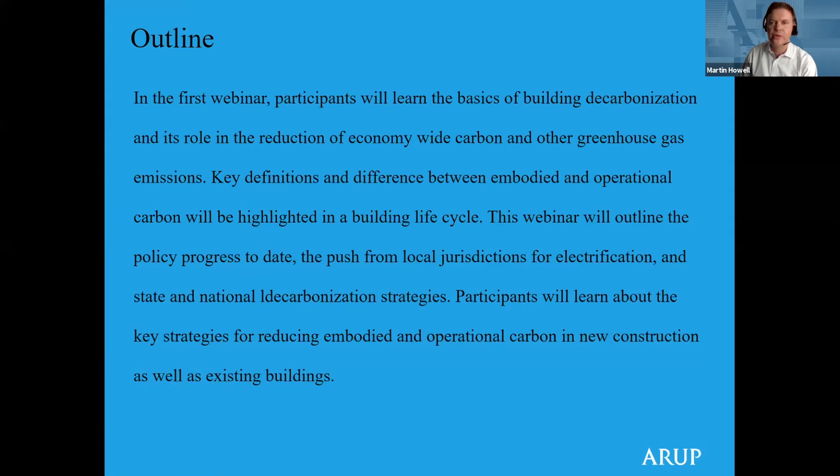And so, as Ruby mentioned, this is the first of 3 webinars focused on decarbonisation. This particular session is titled Carbon 101 and is really meant to be a foundational session that will cover some key definitions. It will outline some of the policies and other drivers for decarbonisation, as well as touching on some of the enabling approaches and trends that are leading us down the path of decarb. It will also briefly cover the differences between embodied and operational carbon, but we'll be leaving the remaining 2 sessions to do a deeper dive on those, and those I think are envisioned to happen in March and April.

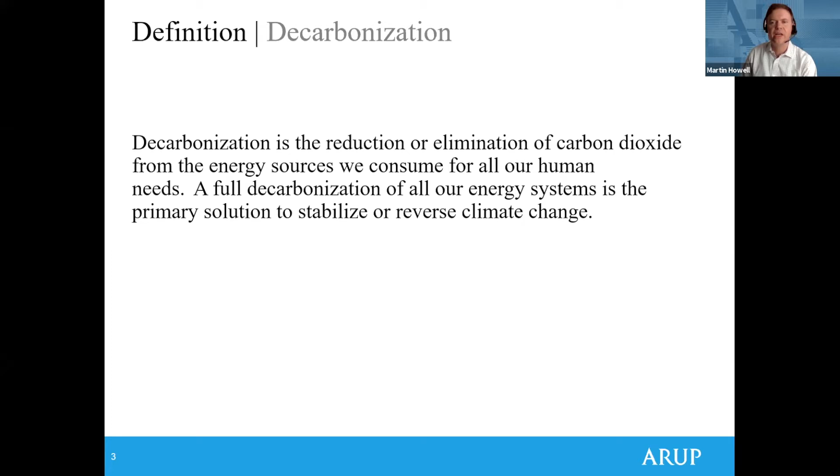There's a range of approaches that are used to decarbonize, ranging from using energy in a more efficient way, say in our buildings, to generating energy using renewable resources like the sun or wind. When designing buildings, this also begins to touch on choices made in the selection of materials, perhaps with a focus on materials that are more natural, such as timber, or those with a smaller carbon footprint from the manufacturing process. And then there's also personal lifestyle choices that can help us to decarbonize. So, for example, choosing to carpool to the office, or to take public transportation, or choosing a less carbon intensive diet, like a plant-based diet.

So scope 1 covers the emissions from fuel directly burnt on site. So say for a higher education campus, that would typically include natural gas that's used to provide space heating and domestic water heating. And if the campus owns, say, a fleet of vehicles for maintenance that uses fossil fuels, it would also include the emissions from those. Scope 2 covers the emissions from electricity that's produced off-site, typically by a utility company like Edison, but used on the campus. So again, with our higher education example, that would include the electricity associated with lighting the buildings, running fans and other equipment needed for air conditioning and so on.

And then scope 3 is by far the largest bundle of emissions and pretty much covers everything else. So again, for our higher ed campus, that might include business travel by employees, say for attending conferences. It might include the emissions associated with outsourced activities, such as maybe food service, and also covering emissions associated with products purchased for use on the campus, as well as things like carbon associated with the construction and renovation of buildings.

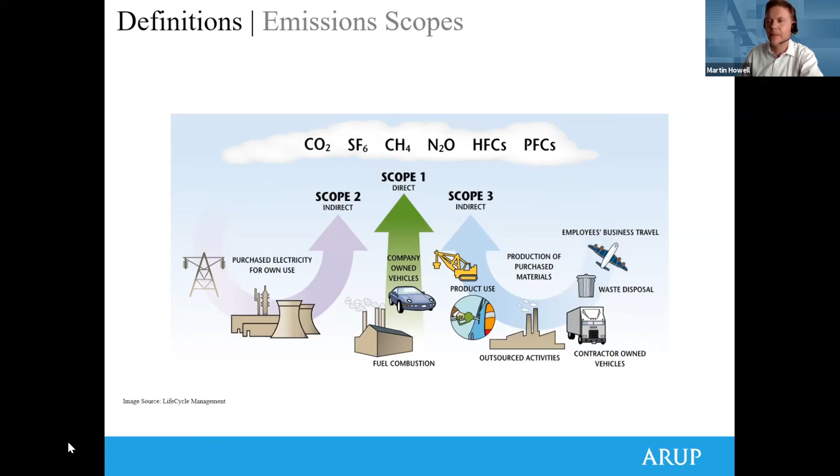So a few more definitions that we're hearing a lot about currently. These are all focused on finding ways to decarbonize the built environment. All of them actually focus on Scope 1 and Scope 2 emissions, so fossil fuels burnt on site plus purchased electricity. The first two definitions are used somewhat interchangeably. That is a zero net carbon building and a carbon neutral building.

These would typically be referencing buildings that have implemented pretty high levels of energy efficiency. And on an annual basis, they are cancelling out the amount of carbon emitted through the use of energy by either sequestering an equal amount of carbon or offsetting through on-site renewable energy production, or in some cases procuring off-site renewable energy, or even purchasing carbon credits to wipe out the carbon debt.

So again, the accounting is typically completed at the end of the year, and when the annual carbon emissions are fully offset, that building will be a net zero carbon or a carbon neutral building.

The third description here, a zero carbon building, is one where no carbon was really emitted from the get-go. So really, this is where we should be heading with our buildings. In this case, it will likely be, again, a highly efficient building with on-site renewable energy and in all likelihood some form of on-site storage that allows it to capture excess renewable energy and use that on-site when needed.

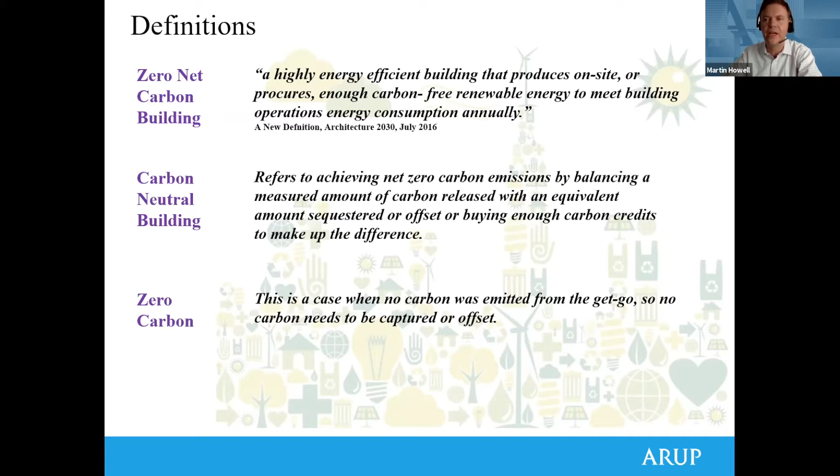And so onto the drivers for decarbonisation, and we've touched on some of these already, but these are really broken down into economic, environmental, and societal. So the three-legged stool, or triple bottom line, as it's also known. Under economic, we have rising energy costs, and the idea that implementing energy efficiency and renewable energy on site will provide some level of insulation against these.

I think another way of looking at that would be to say that energy costs will really start to rise when we start seeing the impact of infrastructure upgrades required by things like electrification and grid hardening, but also that we might see other pricing triggers like carbon pricing start to factor in, similar to the way it has in New York through Local Law 97, which requires existing building owners to invest in decarbonization strategies or be exposed to fines. So energy efficiency and on-site renewable energy will really provide some protection from these economic triggers.

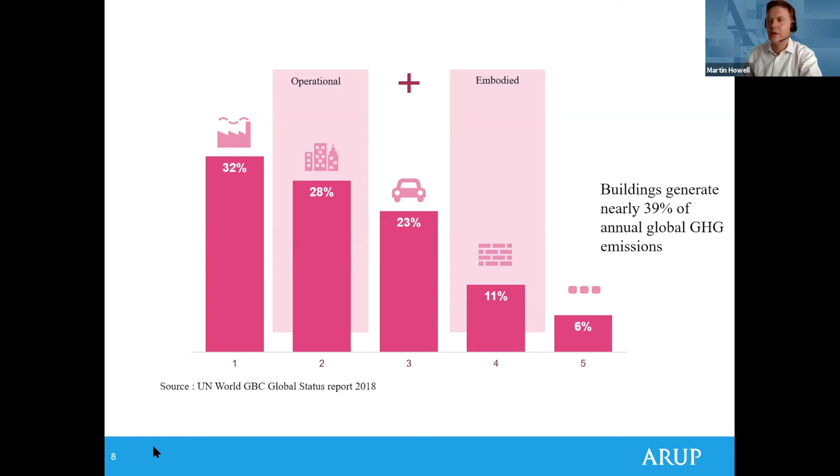These continue to get updated, typically on a 3-year cycle, and continue to aggressively require increased levels of energy efficiency. And they've also started to now impact existing buildings that are undertaking major renovations as well. But additional mechanisms will probably be needed in California to help decarbonize existing assets.

Enabling renewable energy is also critical, and that should recognize that some systems might be on-site, some might be off-site, as driven by the spatial constraints of a given building or given site. For off-site, that could include things like community solar, or arrangements with utility companies to develop a solar system for a specific entity to offtake that solar.

We've also seen code changes that are driving renewable energy, including a requirement that solar is provided now on residential buildings in California, and that non-residential buildings are designed to allow a solar system or a renewable energy system to be added at a later date.

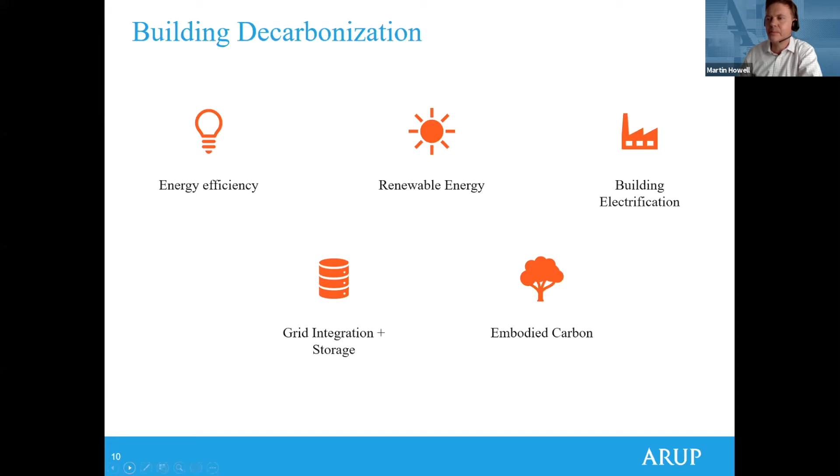So moving on now to some of the policy targets that are already out there. So these really start at the global level, set by the Paris Accord, which is moving us towards a climate neutral world by the middle of the century. And then we move down to the commitments that the US previously made for the Paris Accord, which will see us commit to limiting global warming to 2 degrees, preferably closer to 1.5 degrees compared to pre-industrial levels.

So the goals on the screen in blue are the goals that were set previously by the Obama administration, and they will be updated by the current administration as part of rejoining the Paris Accord. And then on the next tier down, we have the state targets and state policies. So AB 32, which initially set California's commitment to decarbonization back in around 2006.

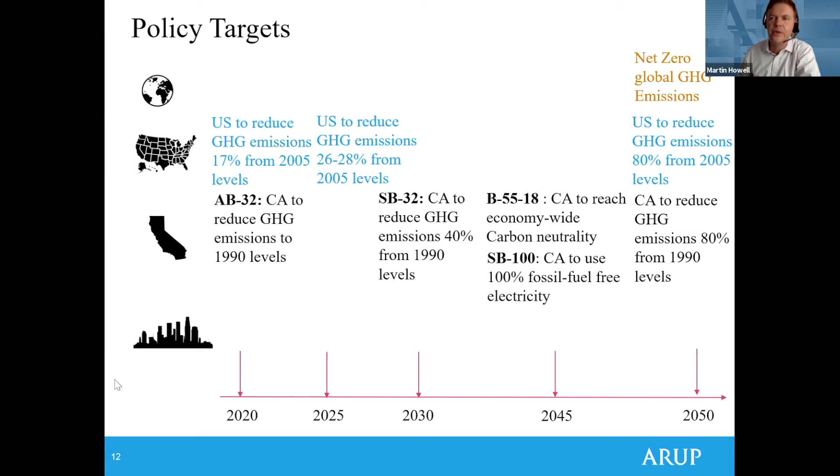And since that point, there's been additional bills that are now committing the state to reduce emissions by 80% compared to 1990 levels. Additionally, there's SB 100, which requires utilities to push towards providing 100% fossil fuel-free electricity by 2045. And that's really driving the push towards electrification of our buildings and transportation systems.

And then finally, we have the local policies, and these are taken from the City of LA's Green New Deal. So this is calling for all new buildings to be net zero carbon by 2030, and for the city to be carbon neutral by 2045. So a range of progressive policies in California, and I think the hope is that we're going to start seeing some similar ones be drawn out by the federal government.

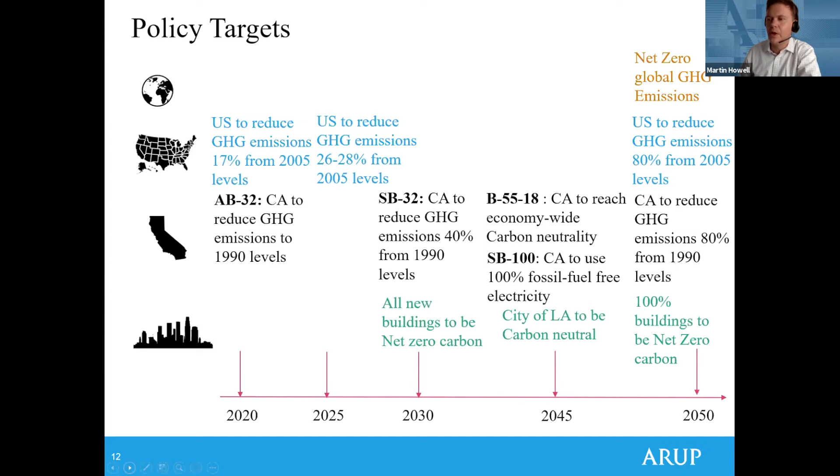So the next one I wanted to talk about was the subject of electrification, and this is really continuing the theme of local policies. So the trend of electrification, which is really substituting appliances and end uses normally served by natural gas with electricity.

So we're seeing some cities now adopt what are called REACH codes. So these are policies that exceed the state energy codes, and they are leading to the limitation of natural gas usage, or the banning of natural gas completely at the city level. So this charge was really led by the city of Berkeley, which banned natural gas in new multifamily residential buildings. San Francisco has more recently banned natural gas in all city-owned buildings and all non-city-owned new construction.

And then we've seen some cities limit natural gas use, so maybe allowing it for certain building types or end uses, such as maybe cooking. But other cities have a broader mixed energy policy, so are pushing for increased energy efficiency, for example, when allowing the use of natural gas. So in all, there's about 26 plus cities in California with some sort of natural gas limiting policy in place.

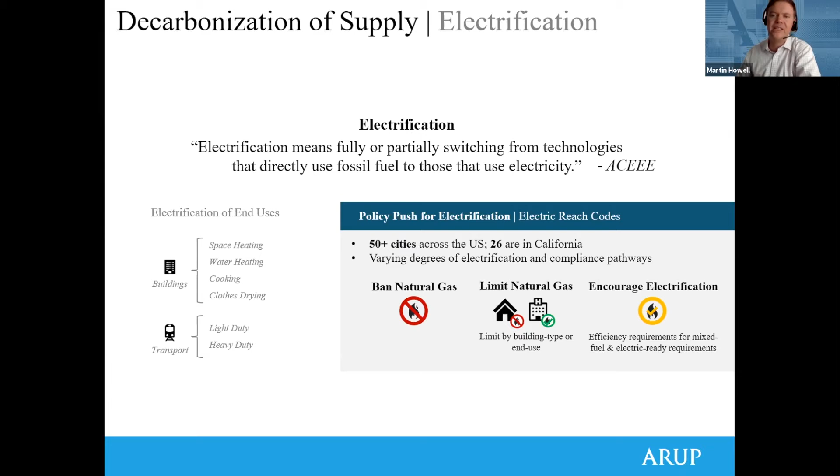And then the final one for me before I hand over to Zara, the other trend we're seeing in other parts of the world and are starting to see creep in here is a focus on decarbonization of natural gas networks. So Hy4Heat in the UK is one current example of a program that's looking at appliances in homes and their ability to burn different blends of hydrogen.

The driver for this is that electrification currently makes sense in new construction from a cost perspective in many cases. It's a lot more challenging to implement electrification within existing buildings. So we've seen governments in Europe and Australasia start implementing pathways to decarbonize natural gas networks by blending hydrogen of differing amounts, and in some cases looking at fully replacing natural gas with hydrogen that's produced from curtailed renewable energy, or where emissions from the production of the hydrogen are sequestered.

We've also seen, locally, SoCalGas go public recently with a hydrogen blending trial that will seek to blend renewable hydrogen within their existing network. So I think the takeaway here is that decarbonization is going to be a huge challenge that we're all going to have to wrestle with, and there's really going to need to be a broad suite of strategies on the table in order to get us to the point where we've really removed carbon from our lives.

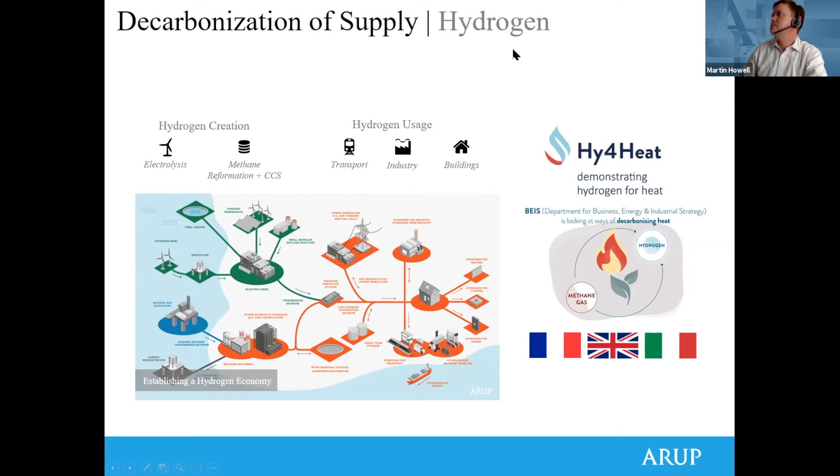Thank you, Martin. If you could bear with us for a minute as I share my screen. Can you stop sharing, Martin? Yep. Okay. All right. Share screen. All right. Can everyone see my screen? Yep. All right. Okay.

After understanding what decarbonization of the built environment means and going through some of the basic definitions and policies, I wanted to highlight the difference between embodied and operational carbon a bit more, with a larger focus on embodied, as most of us are more familiar with the latter. Until only recently, embodied carbon was a significant and largely ignored gap in the industry. It is gaining increasing attention, and it is now recognized that embodied carbon emissions make up 20 to even 50% of the whole life carbon emissions of a new building.

Embodied carbon, by definition, is the carbon emissions associated with the materials and construction processes throughout the whole life cycle of a building. In other words, it is a carbon footprint of all the materials and the products that go in a building. It considers how many greenhouse gases were released throughout the supply chain, and building elements such as foundations, frames, and other forms of superstructure often represent the biggest contributors to embodied carbon.

Operational carbon is a term used to describe the emissions of carbon dioxide and other global warming gases during the in-use operation of a building. A typical building uses energy to meet heating, ventilation, cooling needs, and then the other uses such as lighting, cooking, plug loads, domestic hot water, they also consume energy. It's important to note, however, that operational carbon does not include water use.

Recognizing that we don't have much time left to address climate change, we need to focus on strategies that can deliver the largest reductions in the shortest time. And reducing embodied carbon emissions provides that opportunity because of the time value of carbon. Since most of these emissions happen even before the building operates, we need to consider not only the amount of savings, but the time frame of those savings to meet the emissions targets that are set out by the Paris Accord.

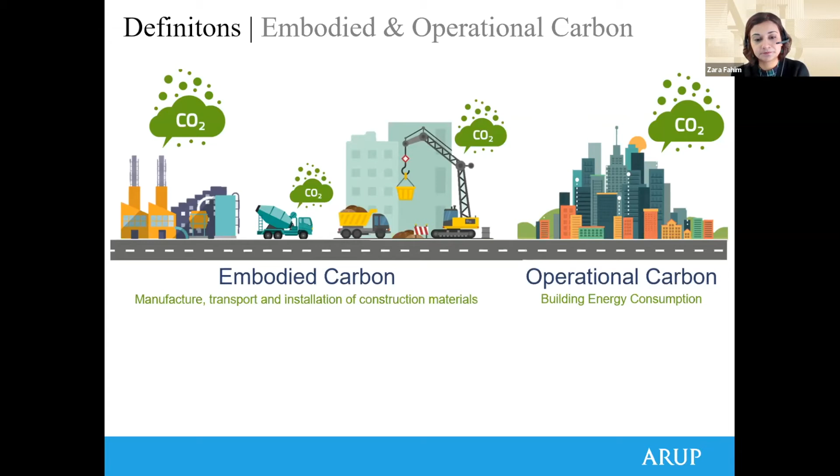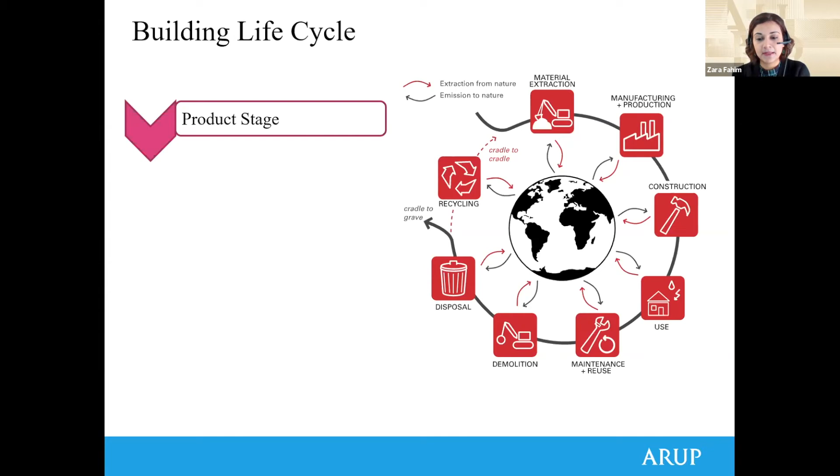What does the term building whole life cycle mean? It begins with what you call the product stage. The product stage includes the emissions caused during the material extraction, transport to the manufacturing facility, and the manufacturing itself. Then comes the construction stage. The construction stage includes the transportation of these building materials or products to the construction site, and the construction and installation process itself. And both the product and the construction stages form part of what is called the upfront carbon emissions. Then the use stage begins.

Once the building is constructed and occupied, this is when the building starts to operate. What is not part of operational carbon, though, is the maintenance, repair, refurbishment, and replacement, which is typically called the use stage embodied carbon. It basically includes the materials and the processes that were required for the upkeep of the built asset throughout the building life cycle.

The next stage is the end of life stage, which is the end of life carbon emitted during deconstruction, demolition, the transport to waste processing, and final disposal, which is what forms a typical building life cycle. Beyond the life cycle are the emission savings that are incurred or emissions avoided due to reuse, recovery, or recycling of materials.

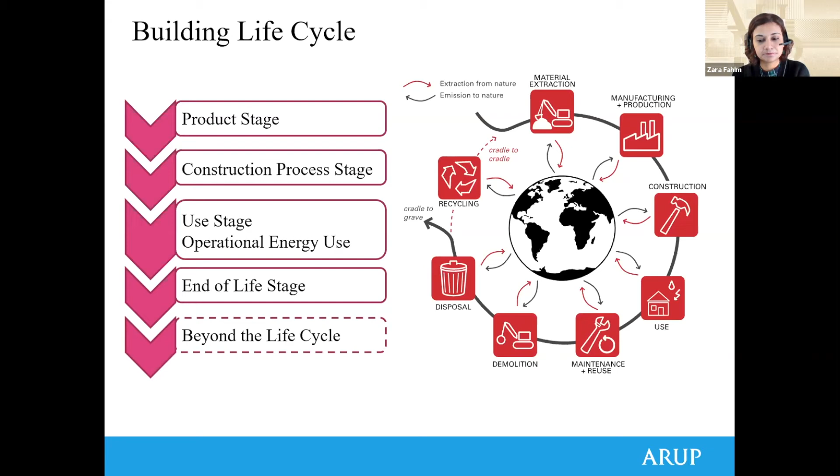Life cycle assessment. Now, we can quantify material emissions and the environmental impacts of a building across the whole life cycle using a life cycle assessment, or LCA. System boundaries determine which processes are included or excluded in an LCA or an embodied carbon study, and are often differentiated by terms you must have heard, such as cradle to gate, cradle to grave. And what they mean basically is the measurement starts at cradle, which is the earth.

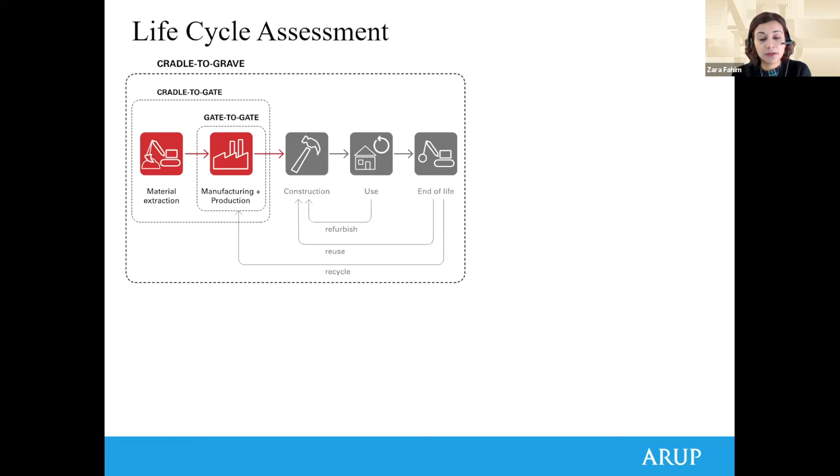Studies in which impacts are assessed only to the point where the product leaves the factory gate are called cradle to gate studies. Those which include all life cycle phases up to the point where the building is demolished and the materials disposed of as waste is cradle to grave. And if recovered and recycled, they're called cradle to cradle. It is generally recognized that studies should include cradle to grave impacts when considering the whole life cycle.

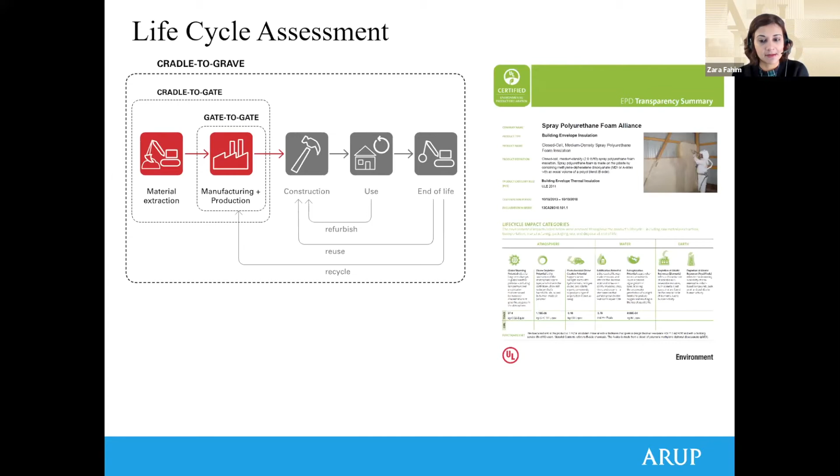The results of an LCA of a product or a material are increasingly communicated in the form of environmental product declarations, or EPDs, which can be compared to the nutritional information that we find on the back of the products we consume. They are used by manufacturers to detail the performance of their materials, certify the carbon and environmental impacts of their products, and they are a very important data source for conducting the LCAs.

Operational and embodied carbon are both measured in the units of kilogram of carbon dioxide equivalents per meter squared of the building. This value is calculated by multiplying the electricity and the gas that is consumed by the building with their respective source carbon conversion factors and then summing them up. EPA produces a list of these emission factors or source carbon conversion factors. The carbon conversion factor for electricity, for instance, also includes all the generation, transmission, and distribution losses.

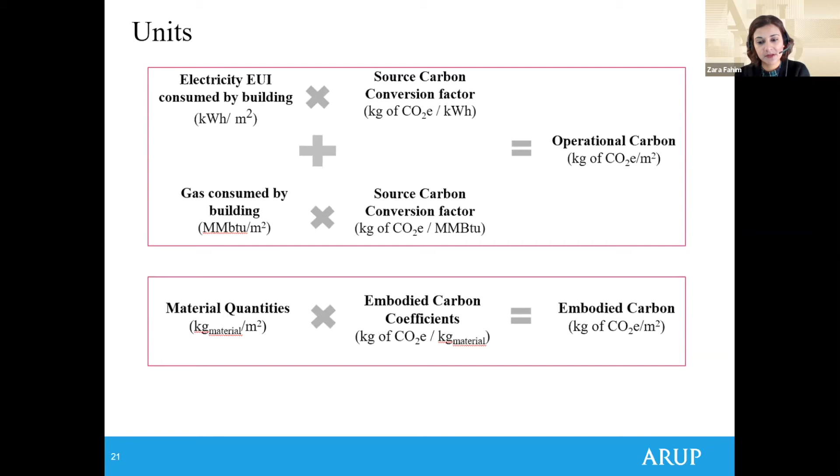The embodied carbon of a building is simply the material quantity multiplied by the embodied carbon coefficient. The embodied carbon coefficient is what factors in how the material is sourced, manufactured, transported, and all the emissions that have to do with that choice of material. So what is important is the material quantity, and material quantity in the embodied carbon world is what EUI, or energy use intensity, is in the operational carbon world. So in essence, material efficiency is the new energy efficiency.

There are various zero carbon and zero energy certifications available in the market. Each program takes a slightly different approach. They're all variations on a common theme, such as on-site combustion. Some of them allow, some don't allow any on-site combustion at all. There are different definitions or requirements for efficiency or whether off-site renewable energy is allowed or not.

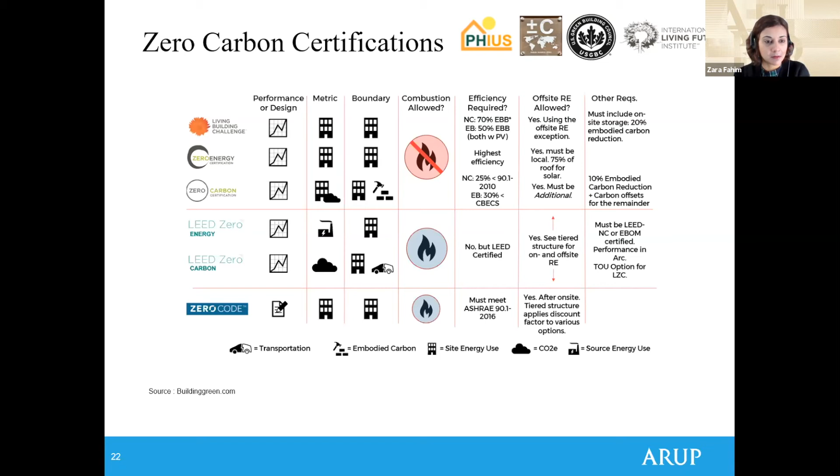Unless the embodied carbon footprint is included in the definition of net zero, we're risking neglecting a large amount of the upfront carbon emissions, which is why many of the zero carbon certifications do list requirements for both embodied as well as efficiency requirements to reduce operational carbon.

Moving on to strategies for embodied carbon, the following reduction strategies are applicable for new construction and renovation projects, which I will be diving into in detail in the following slides. It is important to note, however, the best way to reduce embodied carbon is through prevention. By building nothing, we altogether eliminate the potential for embodied carbon emissions. However, when building, considering these reduction strategies from the outset, whether for a whole project or for a single product, is key.

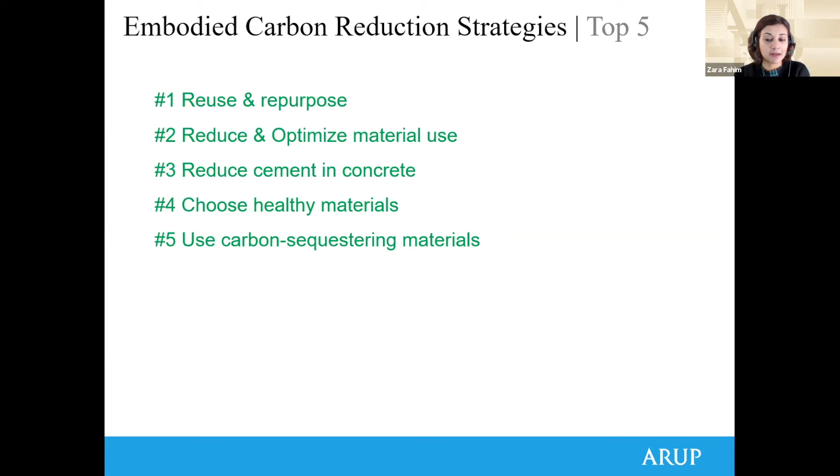The first strategy is to reuse and repurpose. We should always question the need to use materials at all. Consider alternative strategies for delivering the desired function, such as increasing the utilization of existing assets through renovation or reuse. An example of such a repurposed building is the Spruce Goose Hangar in Playa Vista, the picture on the left. This was built in the 1940s to build the Spruce Goose airplane, but now, thanks to some innovative architectural and engineering innovations, it has been given a new lease of life as a creative office space.

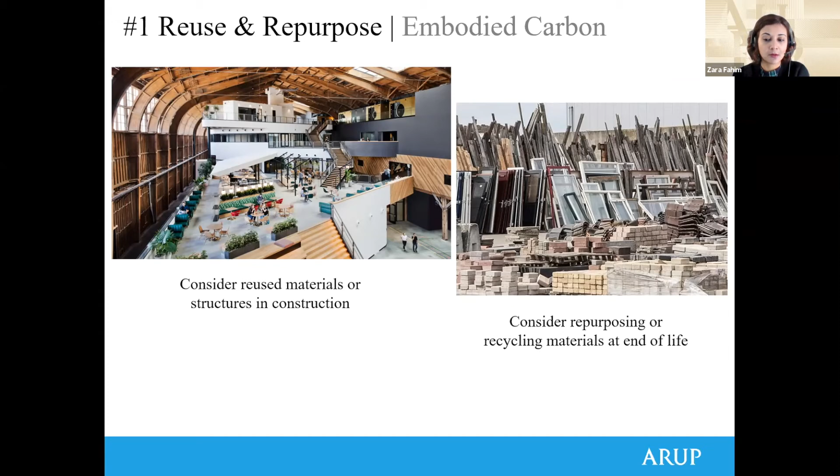Using principles of circular economy, we should find ways to capture waste streams and reuse them or repurpose them for other things, perhaps outside of the process.

The second strategy is twofold, really: build less and efficiently, and build clever. Build less and efficiently basically means planning, designing, and constructing buildings so that they can be disassembled. Think about standardizing beam sizes and bay widths, using bolted connections, prefabricated construction. This will not only increase efficiency of the installation process, but minimize waste on site as well.

The second part of this strategy is to build clever, to plan for the future. Consider future scenarios and flexibility for future adaptation. The example over here is, for instance, when you're designing a parking structure to cover the future adaptability of other uses, addressing items like ceiling height or future elimination of parking ramps that could allow the structure to be adapted to an office, for instance.

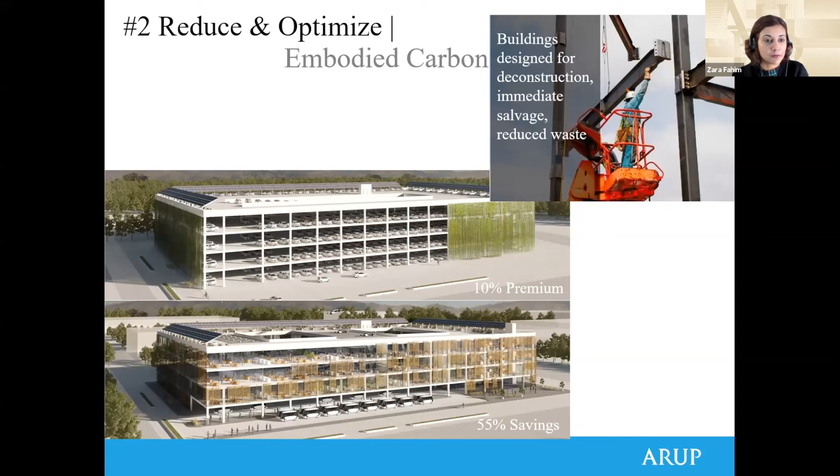A study estimated that paying an initial 10% cost premium on such a flexible parking structure could lead up to 55% savings in cost when compared to constructing a new office building from scratch. And of course, the reductions in embodied carbon are obvious. The third strategy addresses one of the most important sources of material-related emissions in construction, and that is cement.

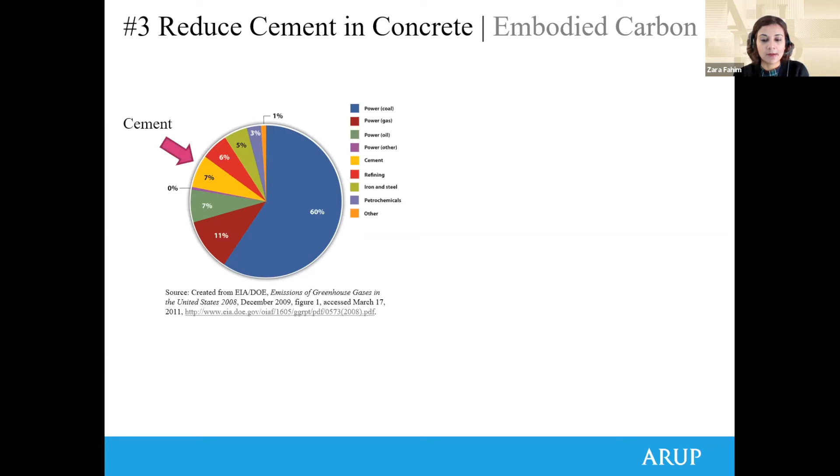Cement manufacture is responsible for around 7% of the global carbon emissions, with steel also contributing about the same, half of which can be attributed to buildings and construction. Both cement and steel require very high temperature during production, and in both cases, they have chemical reactions that take place during the manufacture that release carbon dioxide directly into the atmosphere. The growth of recycled secondary steel is encouraging to reduce the emissions from steel. However, the role of cement and other construction materials is crucial as we discuss the need of radical decarbonization.

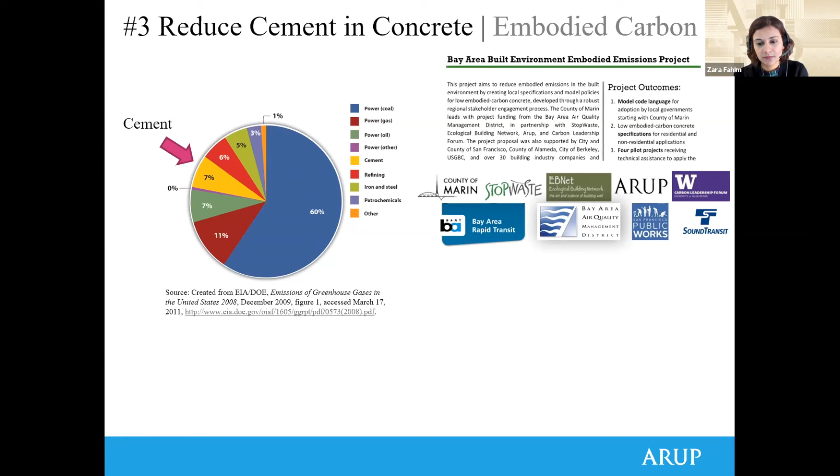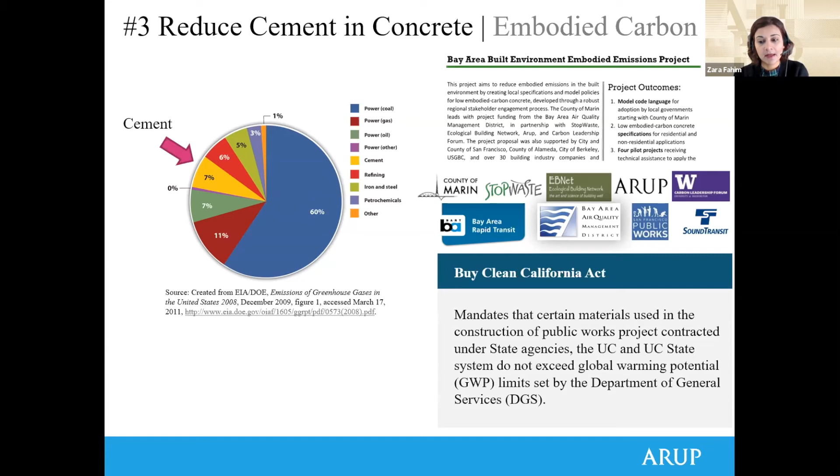And what is gaining momentum is the introduction of low carbon concrete language and codes. And one such example is Marin County Code that puts a cap on how much cement can be used on projects and limits carbon emissions on concrete. This was funded by the Bay Area Air Quality Management District as a grant. The Buy Clean California Act is the first in the nation signed into law that Martin mentioned earlier, and it targets embodied carbon of construction materials, which will begin from July 1, 2021.

The next strategy, as I mentioned earlier, material efficiency being the new efficiency in the embodied carbon world, it is important to specify lower carbon and healthy materials that go within the interior of the building in addition to the structure. Healthy materials have been around for a while. Low VOC paints, no added urea formaldehyde composite wood, they were in the early versions of LEED as well, and eventually were adopted by the state as code.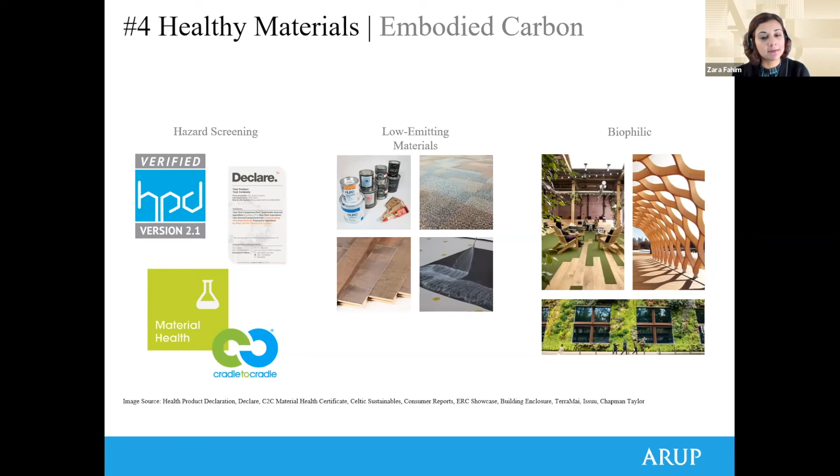Also, this concept of biophilic design is continuing to see interest. It seeks to use approaches and materials that offer more opportunities to connect with nature, with the view that it can increase health and wellness within our built environments and increase productivity.

An extension of the previous strategy, but specifying carbon sequestering materials is one way to reduce embodied carbon footprint. Carbon sequestering materials are materials that absorb carbon from the atmosphere during certain stages of their life cycle. Timber products and other biomaterials like bamboo and hemp present possibilities for capturing and storing carbon during growth. And compared to concrete, more and more timber construction is being seen in the market, particularly for smaller buildings.

Using timber from certified sustainable sources where best practice forest management is applied is key. And of course, the reuse and recycling of timber should be promoted as well. There are many other examples of carbon smart materials as shown on the slide here. And many of these materials have ASTM ratings, tested R values, vapor permeance values, and whatnot, so that professionals and manufacturers can now specify, and we're seeing more and more of these being part of buildings.

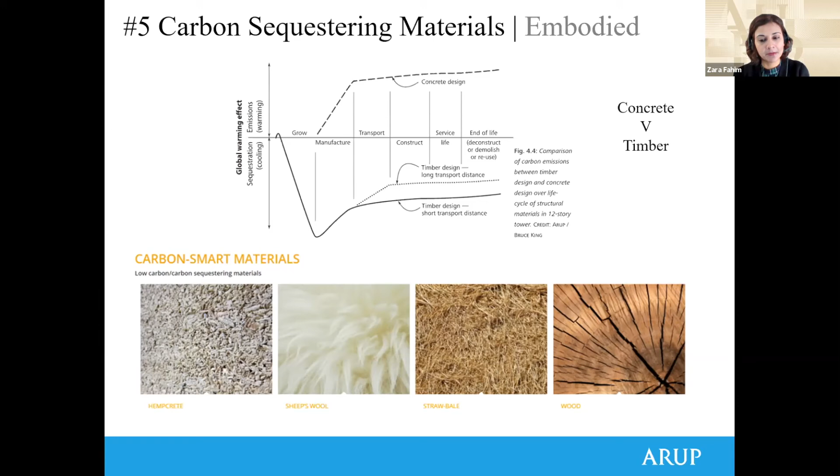Moving on to operational carbon. Operational carbon strategies are somewhat of a familiar subject. These strategies are focused on reducing the emissions related to the operations of a building, applicable for both existing and new construction. And I will not dive into all of these strategies, but most of these have to be implemented before the building even begins operation, during building initial design or during a renovation if the building is being retrofitted. They're typically implemented in the hierarchy of order shown to ensure an optimally designed building.

The first 4 steps, load reduction, passive strategies, efficient systems, and energy recovery, form the basis of reduced energy consumption of your building. This reduced energy consumption is then offset by renewable energy generated on site. And the last step is offsetting the balance of the emissions, not covered through each of these other steps, through the purchase of carbon offsets.

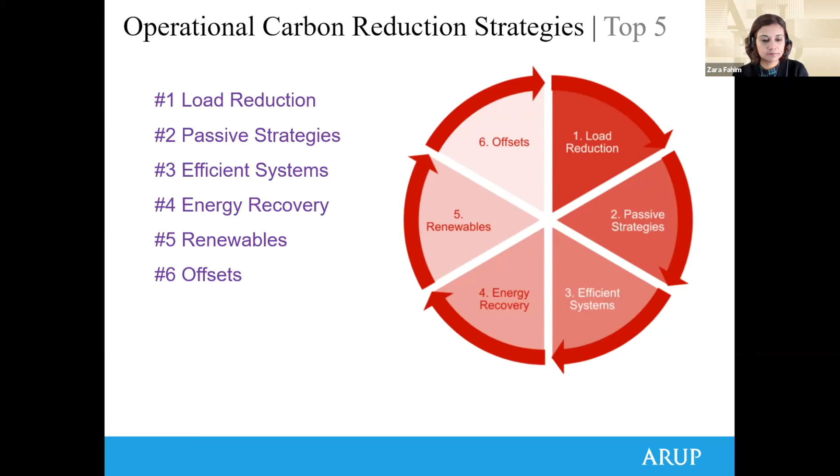Reducing building load through incorporation of passive strategies is key to ensure that the building's operational carbon footprint is minimum. As design of the buildings becomes more and more efficient, the plug loads, the lighting loads become a significant piece of the end use pie, as high as 33% for buildings like the Bullitt Center in Seattle. So installing LEDs, Energy Star products are obviously some of the strategies that could be used to reduce plug loads, other than very important ongoing monitoring and training of the building staff and users, so they're always tracking their building energy use.

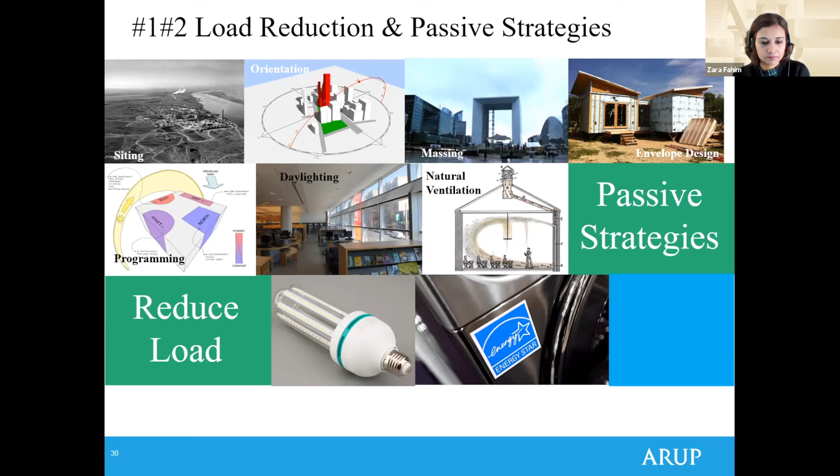The next strategy is investing in efficient systems. By investing more upfront in the building envelope and other building passive design strategies, the reduction in building loads can lead to a smaller sized mechanical system to meet the heating and cooling needs of the building. And some of these mechanical systems listed on the screen, along with passive design strategies, can be used in line with the building electrification trend.

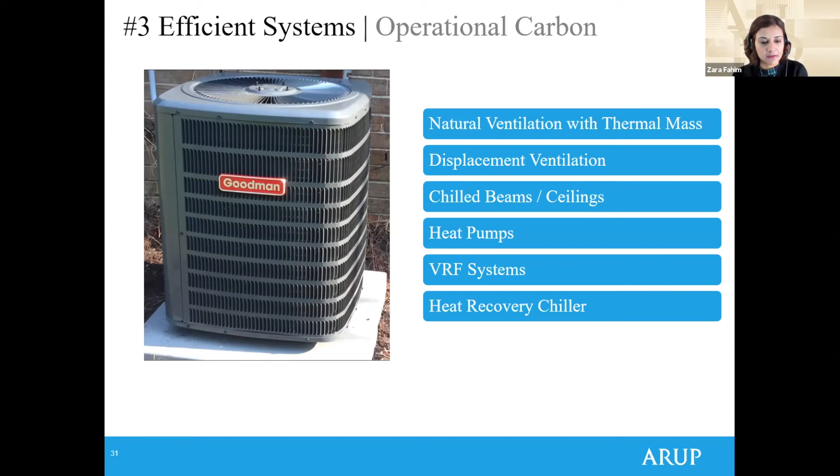Offsets should be used as a last resort to offset both residual embodied carbon and operational carbon emissions, either within the project or organization boundary, that couldn't be reduced through the other strategies that we just discussed, including energy recovery and on-site renewables that I didn't dive into.

Offsets are measured in tons of CO2 equivalent. Carbon offset programs let individuals and businesses offset their environmental footprint by paying to reduce greenhouse gas emissions elsewhere. It typically means that when someone is buying a carbon offset, the money goes to support new projects that reduce greenhouse gas emissions.

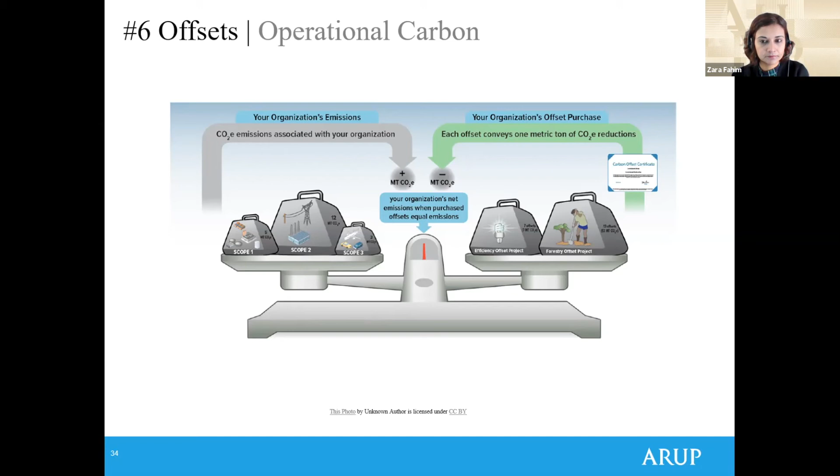Through these last few slides, I want to call the audience to action. How change in our sector will happen is through these 5 interrelated set of actions, which is really an iterative process that needs to begin immediately. By enabling collaboration across the whole value chain between the supply and demand side actors, we can create an action roadmap to act on. We need to communicate our ambitions, our success stories, the research that we've done to build momentum and show evidence of what worked on our projects and what didn't.

We need to educate all relevant members of the value chain. We need to raise awareness of embodied carbon and bring to life this life cycle thinking approach, and address foundational gaps in training and transparency. We need to innovate. We need to create new business models, new technologies, new methodologies, and circular patterns need to evolve. And lastly, through regulations, we need to mandate reductions in embodied carbon that can drive the innovation.

And of course, this change has to happen through deep cross-sector collaboration with the identified key stakeholders on the slide, throughout the value chain, that have a role to play in this approach to decarbonization. All forms of government can lead from the front by implementing ambitious embodied carbon reduction targets through policy and fiscal measures that can help enable the market. NGOs, networks, researchers, they together are catalysts for the radical whole value chain collaboration needed to drive market transformation. Research is crucial in developing new tools, technologies, methodologies or improving existing ones.